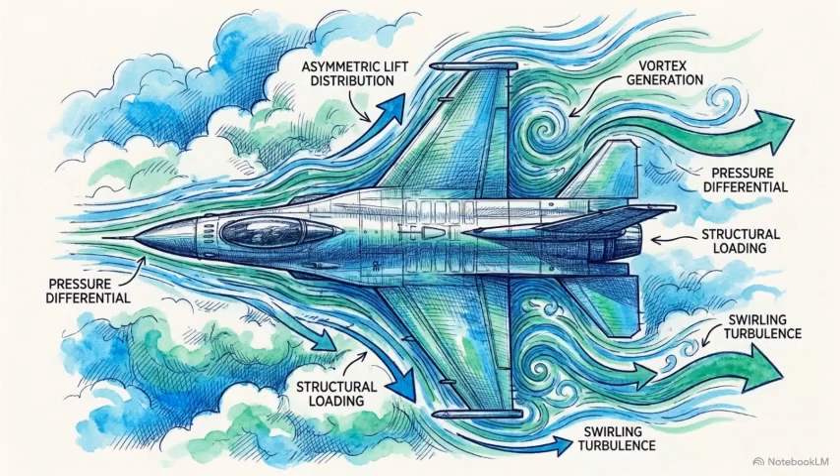Walls of pressure and crosswinds. The resulting aerodynamic forces are violently nonlinear. To the sky, an aircraft is a rigid mass navigating 6 degrees of freedom. It pitches, rolls, and yaws through a fluid environment that resists perfect balance.

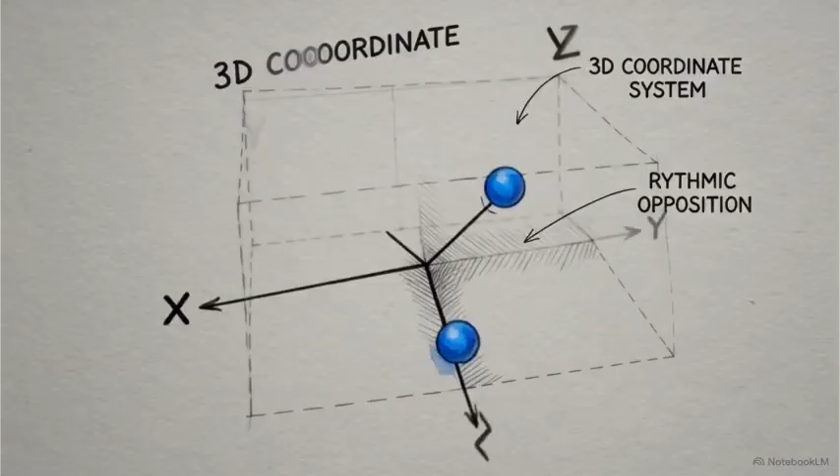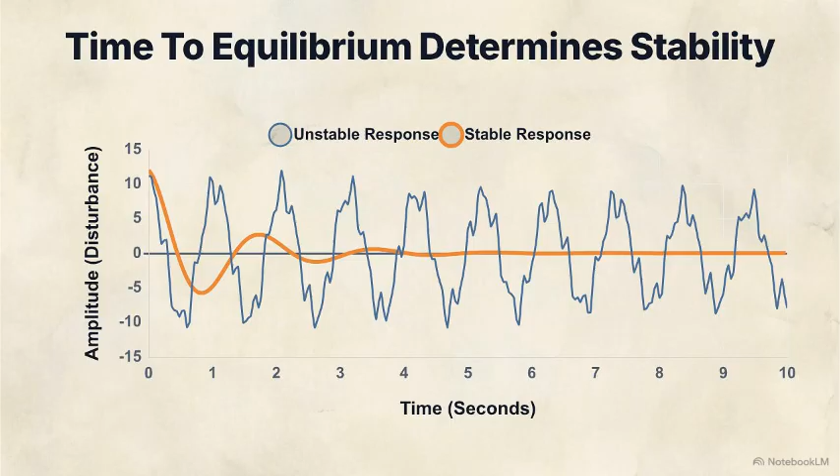For engineers, physical chaos becomes calculable geometry. The thrashing of turbulent flight is isolated and tracked as oscillating points along mathematical axes. This pilot feel, whether an aircraft is stable or twitchy, corresponds to a precise engineering metric: the exact amount of time the system's differential equations take to return to equilibrium.

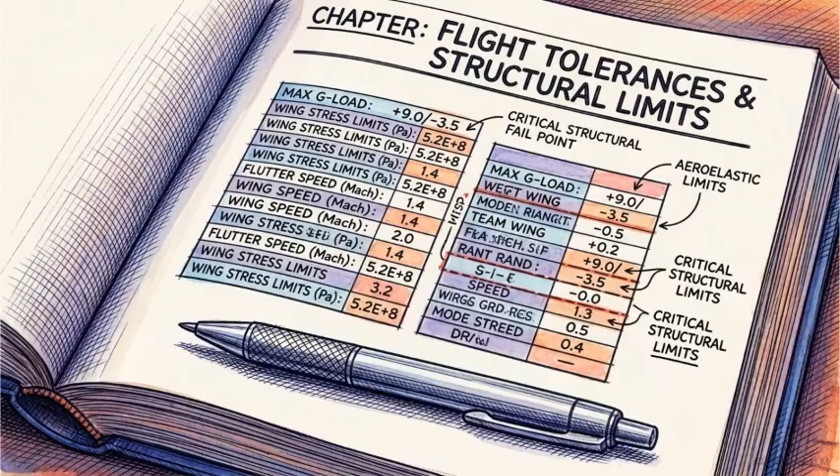High-speed flight requires translating these raw atmospheric physics into the language of regulated control theory. This regulation of physics is codified in what the industry calls handling qualities. To build a compliant aircraft, engineers must adhere to strict regulatory frameworks like MIL F8785C, which specify exactly how an airframe is legally allowed to behave.

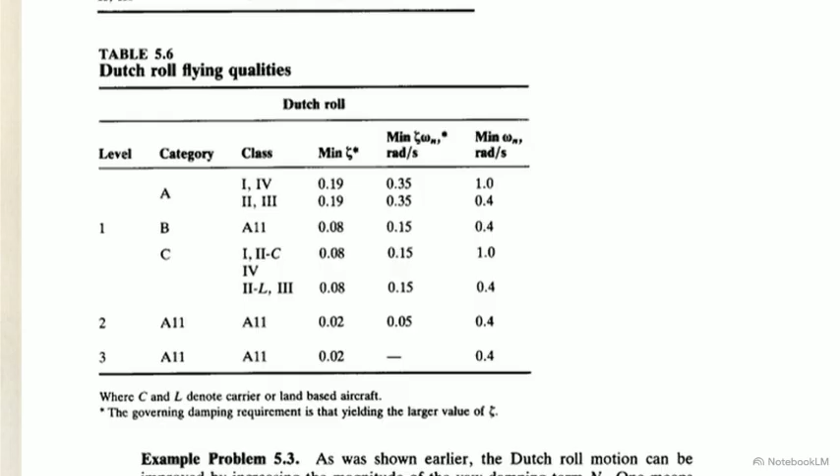This table shows the precise numerical bounds used to categorize aircraft Dutch roll performance. Regulators sort an airframe's behavior into distinct levels, level 1 for acceptable handling, down to a dangerous level 3. Notice the strict limits assigned to the minimum damping ratio.

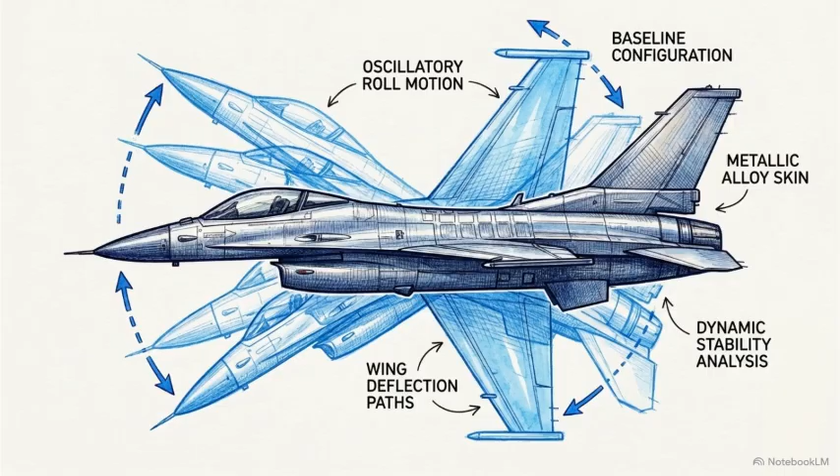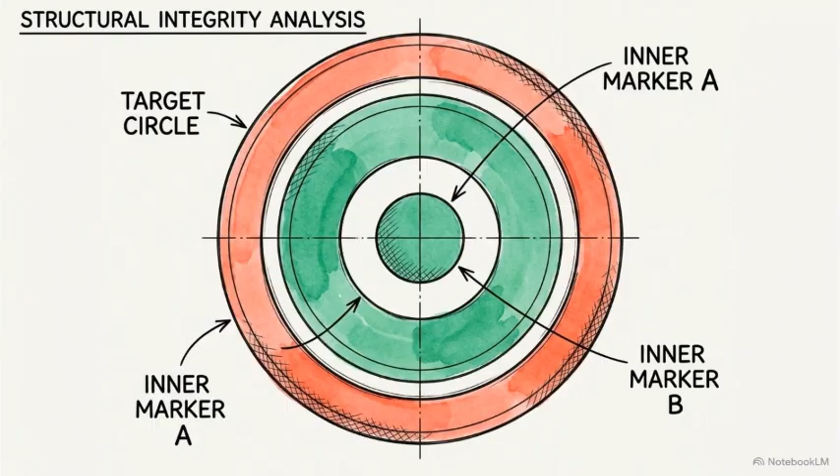To prove an aircraft actually meets these limits, engineers must mathematically isolate its specific second-order dynamic modes, the natural, rhythmic ways the airframe oscillates when a gust of wind knocks it off balance. The engineering objective is to tune 2 specific variables: the natural frequency of the oscillation and its damping ratio. The structure must be designed so that these numbers naturally land inside the boundaries of Level 1 certification.

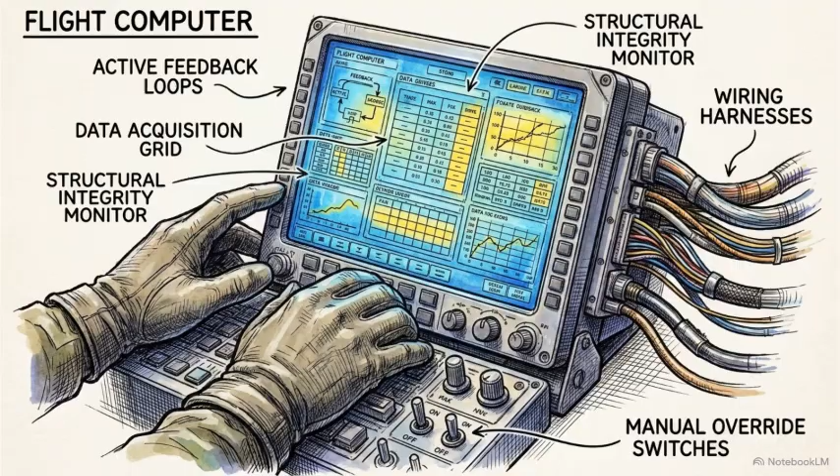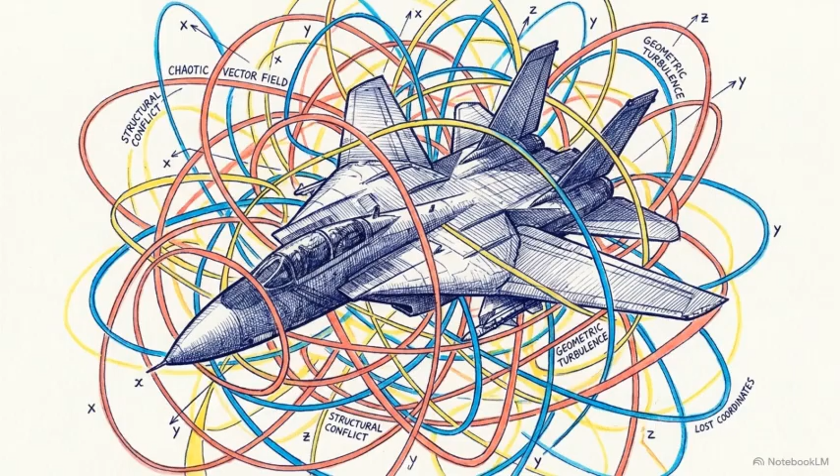But physical shape alone is rarely enough. If the aerodynamic design fails to meet these handling levels naturally, engineers must design active, artificial control systems to manipulate the physics of flight. Analyzing all 6 degrees of freedom simultaneously creates a chaotic web of coupled, nonlinear equations. Trying to use that raw math for linear control design is practically impossible.

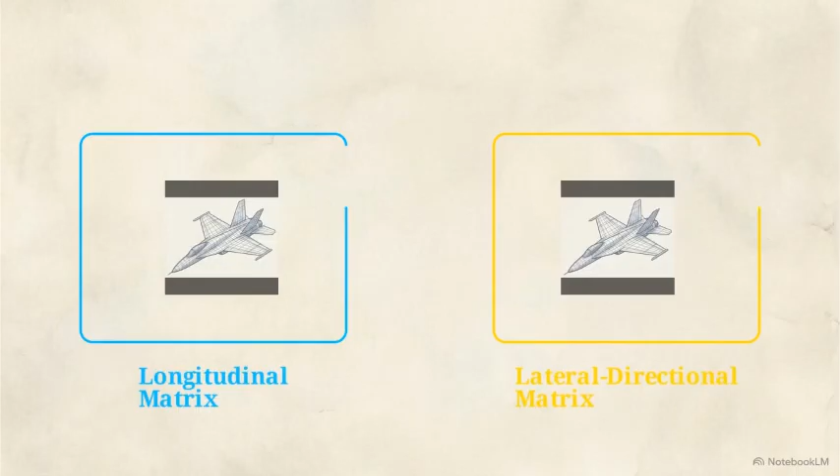To make the system tractable, engineers apply a mathematical tool called small disturbance theory. By assuming the aircraft is only making minor deviations from steady, level flight, they can smooth the chaotic variables into linear approximations. This theory cleanly bifurcates the complex equations of motion into 2 entirely independent matrices, the longitudinal and the lateral-directional. The longitudinal matrix governs motion strictly in the vertical plane. It isolates variations in forward speed, pitching the nose up or down, and plunging vertically through the air.

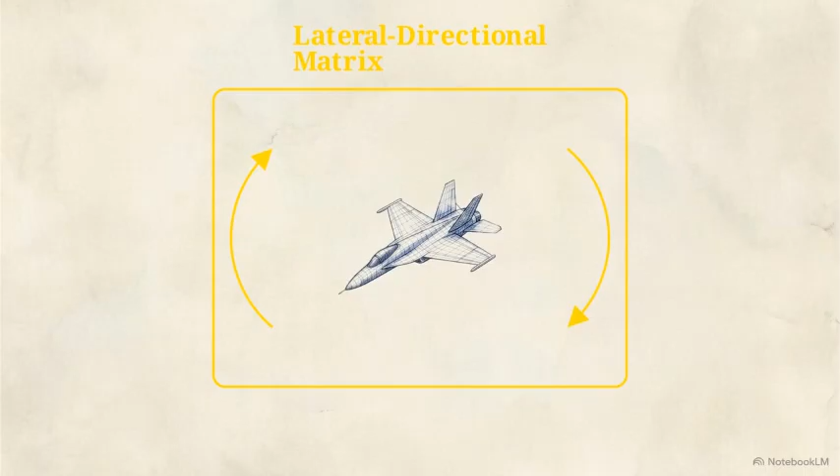The lateral-directional matrix handles the rest. It models the highly complex, coupled interaction of rolling around the x-axis, yawing the nose left to right, and side-to-side slipping. By mathematically decoupling these motions, engineers secure the clean baseline they need to systematically isolate and correct dangerous flight characteristics before a prototype is ever built.

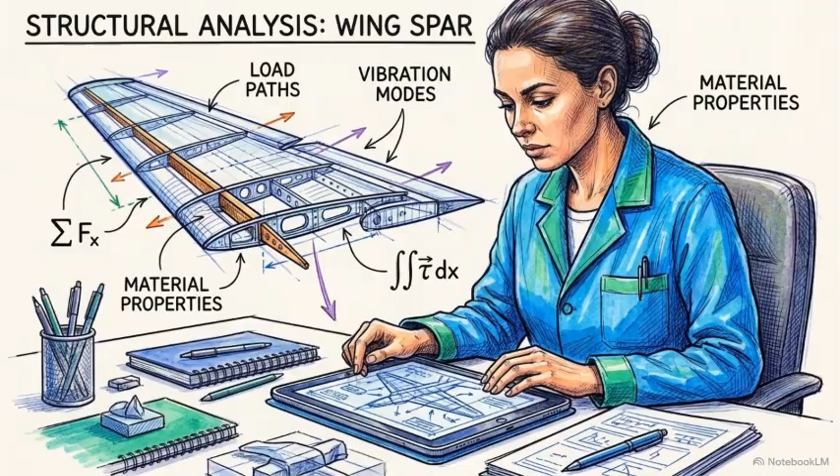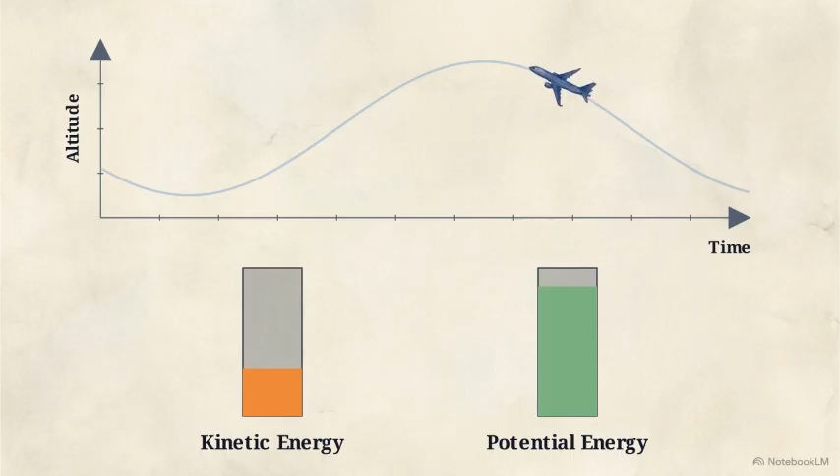Within that longitudinal matrix, the first behavior engineers analyze is the long-period motion, known as the phugoid mode. The phugoid mode is a slow, sweeping interchange of kinetic and potential energy. Over the course of a few minutes, the aircraft gradually trades its airspeed for altitude, climbs, stalls slightly, and then dives to regain that speed.

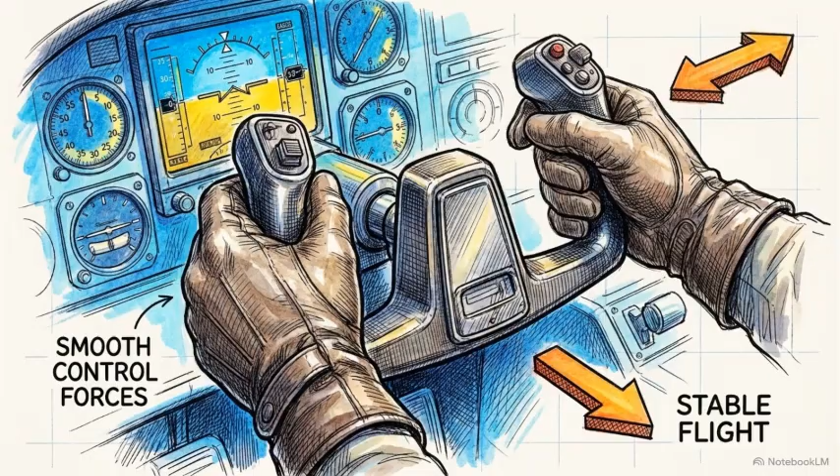Because this frequency is so low and the cycle so long, human pilots easily anticipate and correct the motion. As a result, the regulatory damping requirements for the phugoid mode are minimal. The immediate threat lies in its counterpart, the short-period mode.

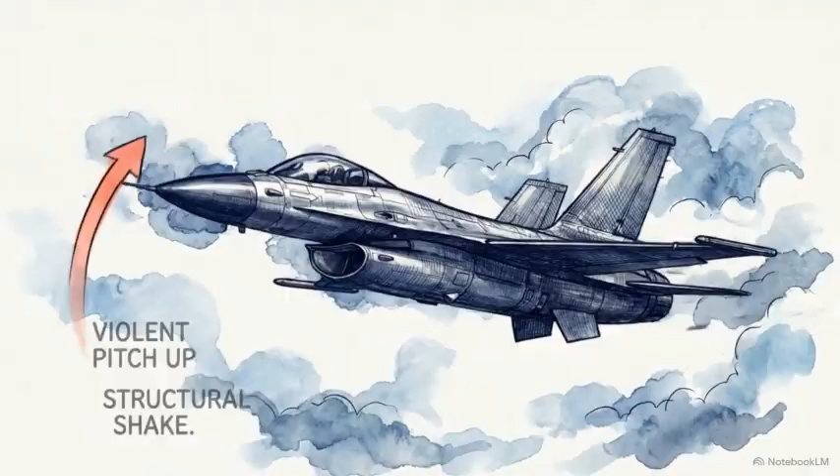The undamped natural frequency of this short-period mode is heavily dependent on the aircraft's physical mass distribution and center of gravity. Move the weight backwards, and you immediately alter where these roots sit. The window for acceptable handling is incredibly narrow.

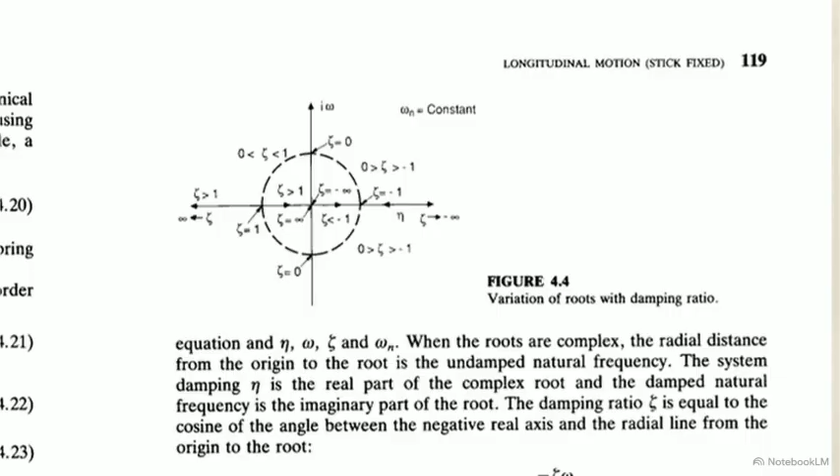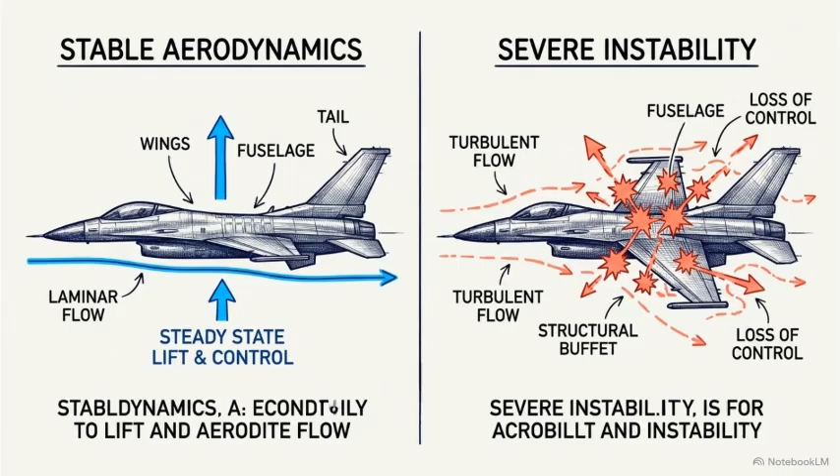To achieve a Level 1 safety rating, these roots must be safely confined to the left half plane, indicating that the oscillations will naturally damp out and decay over time. The location of these roots determines whether the airframe naturally absorbs an atmospheric impact or if the oscillations amplify until the pilot loses control authority.

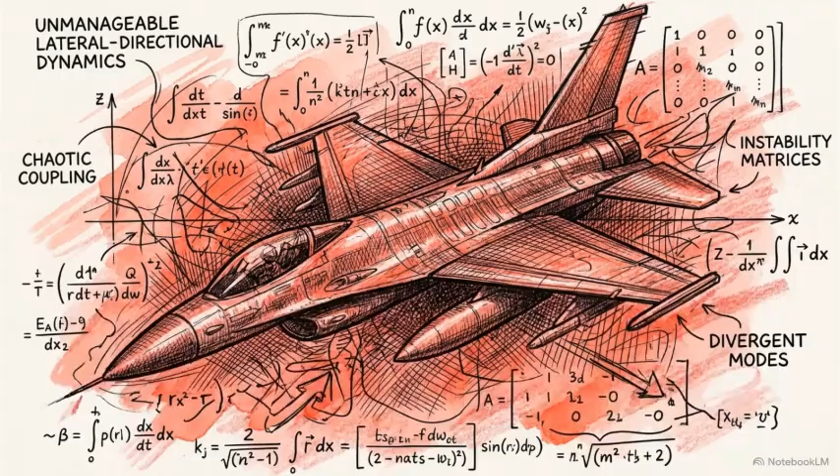Shifting focus to the lateral directional equations, the math becomes significantly more hostile. Roll and yaw rarely operate in clean isolation. Take the aerodynamic reality of lateral directional coupling.

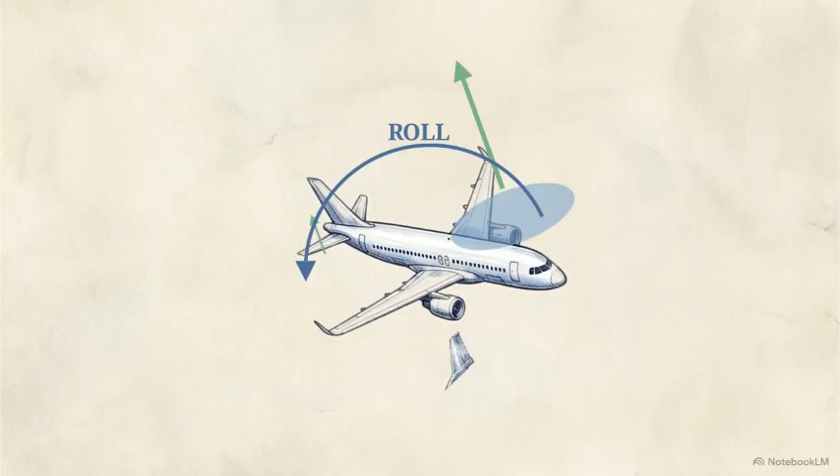When a pilot deflects the rudder to yaw the nose, the outer wing sweeps forward faster than the inner wing. That extra speed generates unequal lift, forcing the aircraft to roll simultaneously. The inverse is also guaranteed. Deflecting an aileron to initiate a roll creates induced drag on the rising wing. That drag acts like an anchor, unintentionally pulling the nose in the opposite direction of the turn.

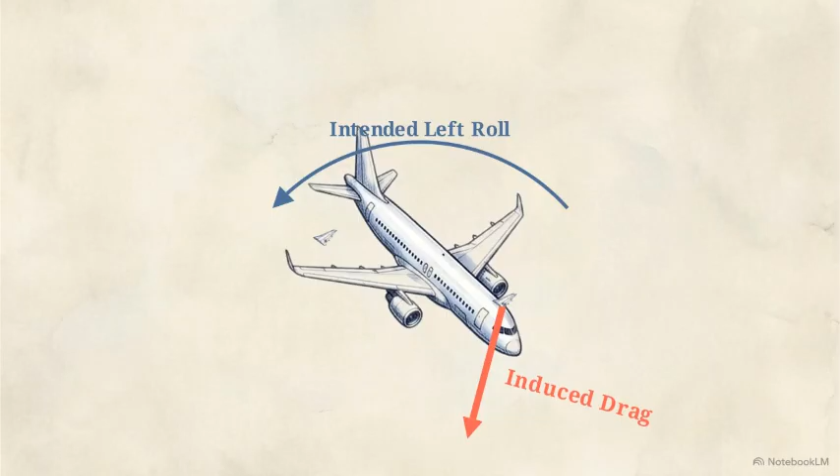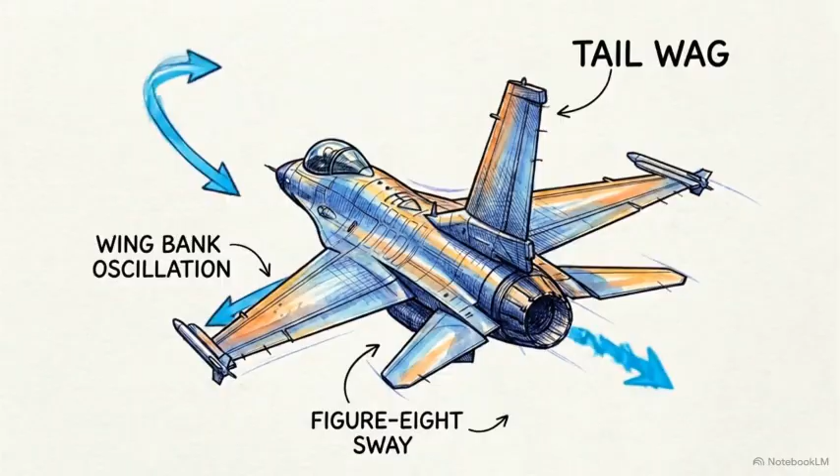This continuous crosstalk breeds the Dutch roll mode, a lightly damped, rhythmic oscillation where the aircraft simultaneously yaws and rolls, constantly out of phase with itself. The Dutch roll perfectly demonstrates why raw aerodynamic stability often falls short of regulatory safety requirements. Without intervention, this motion degrades flying qualities severely enough to require artificial correction.

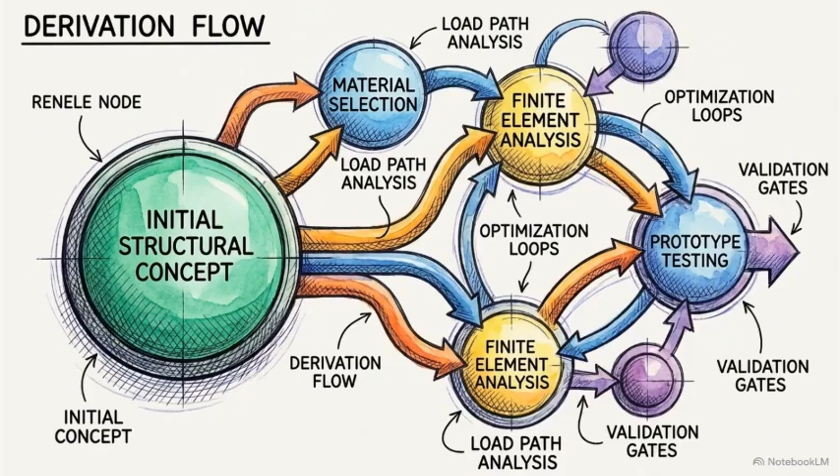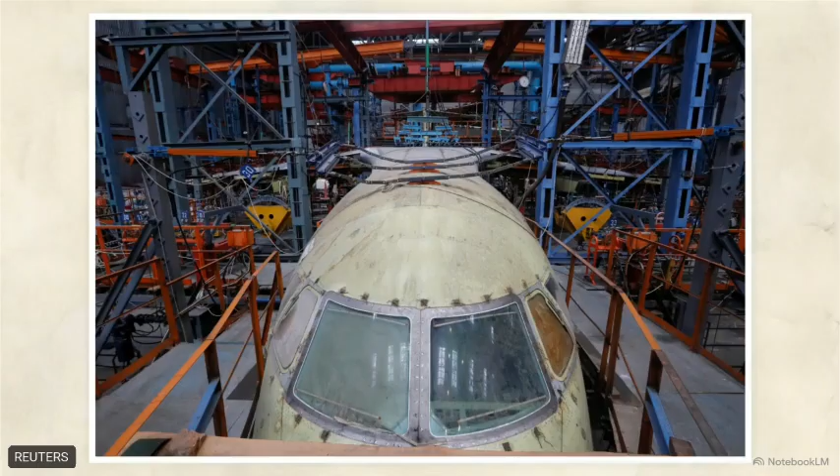Deriving these handling qualities happens in stages. Static stability derivatives, like basic weathercock stiffness, are extracted early using scale models in wind tunnels by measuring surface pressure distribution. But capturing dynamic parameters requires putting physical metal under real stress.

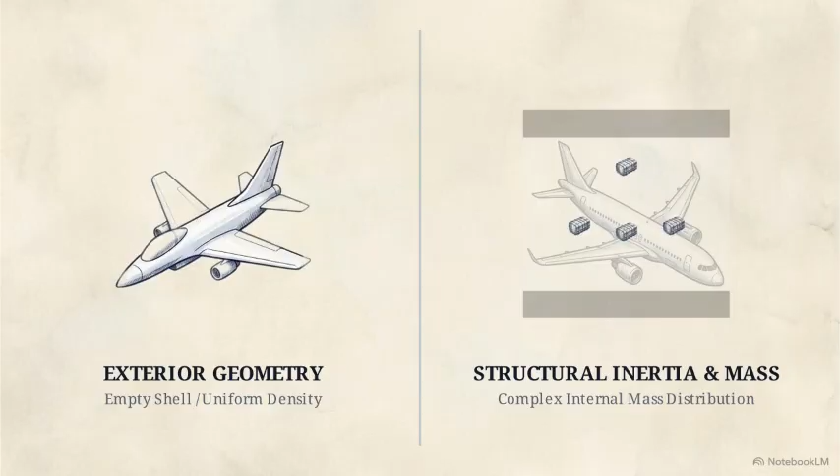Full-scale prototype flight testing, alongside rigorous structural verification, like you see here, is mandatory. This is because scale models cannot accurately replicate structural inertia. The massive weight distribution and unsteady aerodynamics of a fully loaded airframe in motion require a one-to-one environment.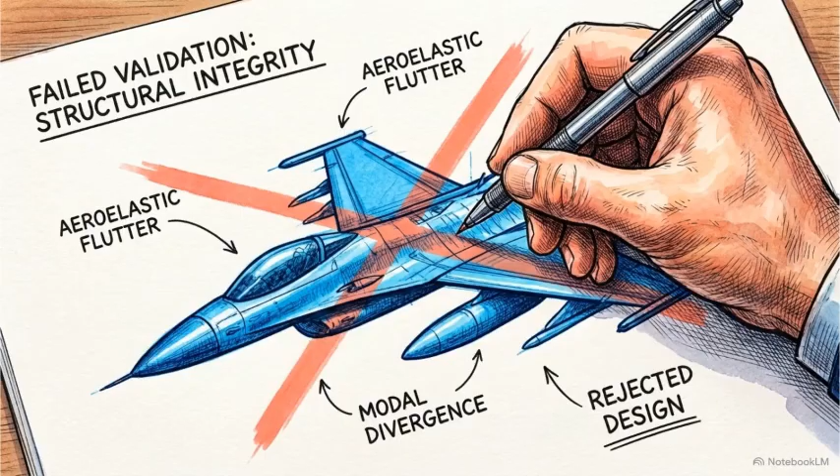Certification standards act as the final check in the engineering loop. If a prototype cannot meet these quantified levels, the final design cannot be validated for production.

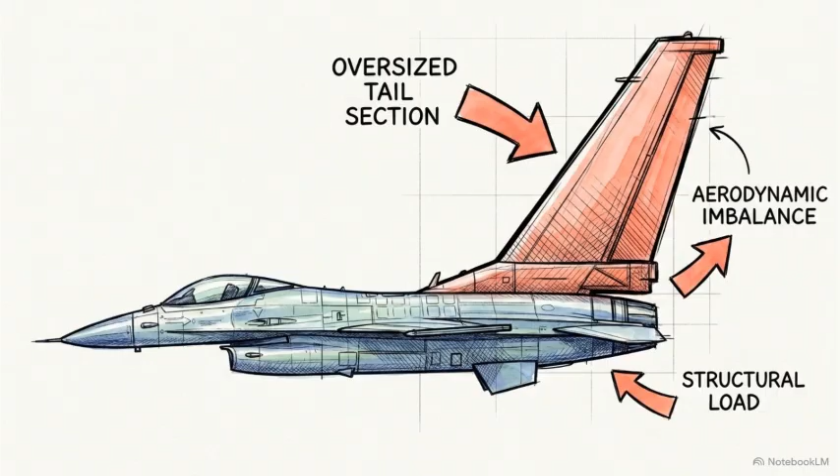The classical brute force solution to lateral directional instability was physical geometry, significantly increasing the vertical tail area to add more directional stiffness. Modern aircraft like the Grumman X-29 cannot rely on oversized control surfaces. Utilizing forward-swept wings, it intentionally prioritizes extreme maneuverability over inherent aerodynamic stability.

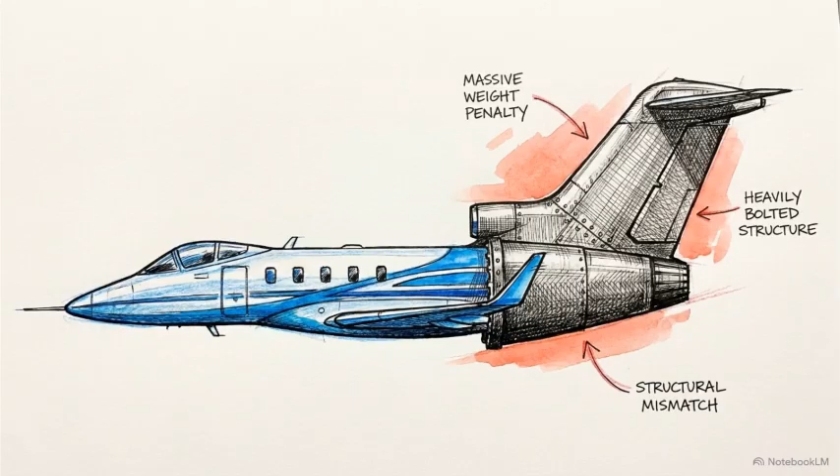Trying to fix that instability by bolting a massive tail onto the fuselage would ruin the aircraft's supersonic drag profile and impose massive weight penalties. When physical geometry reaches its aerodynamic limits, engineers stop altering the external surface. Instead, they bypass the airframe entirely to solve the stability crisis.

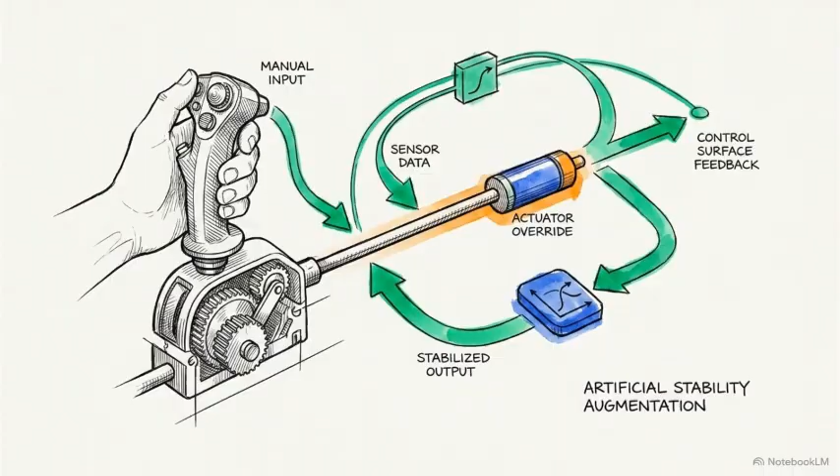Making rudder deflection proportional to yaw rate injects a mathematical gain, K1. This increases damping, forcing the Dutch roll roots into the stable region without adding drag.

Modern aircraft operate through a continuous negotiation between two forces. Fluid dynamics dictate the natural modes of motion, while active control systems inject the artificial damping necessary to keep the pilot in command.